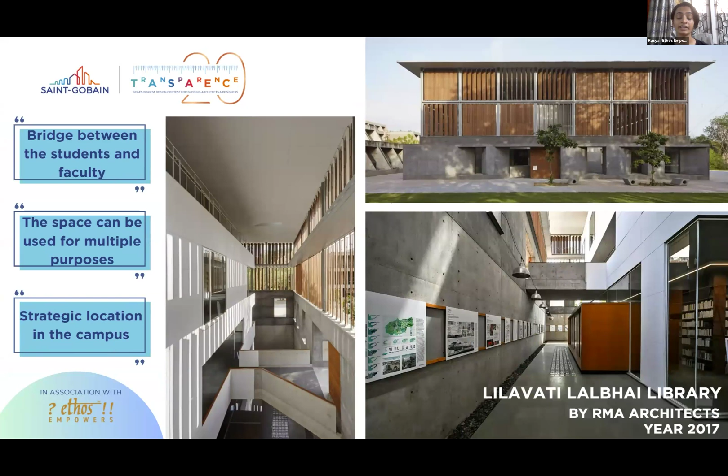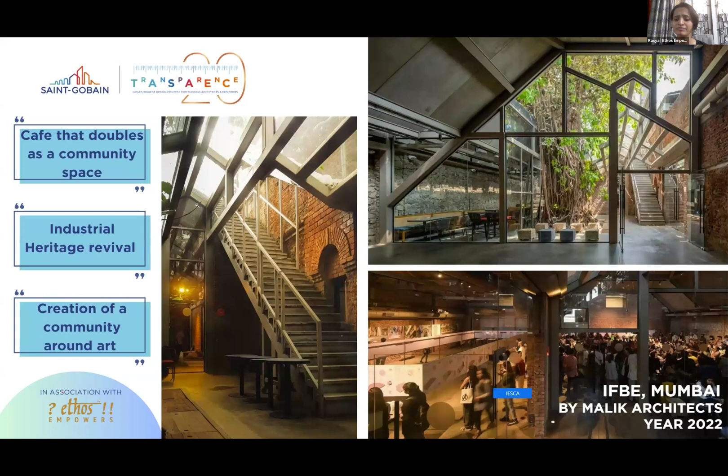Now, when we mention crafting a design vocabulary, we do not want to limit your definition of design vocabulary. It may be the beauty of the combination of form and function of opera houses like the one in Sydney or Oslo, or it could be as down to earth as the incremental housing for the Aranya complex in India, or the austere architecture and interiors of the Lilavati Lalbhai Library by RMA Architects. Or it can be about renovation, adaptive reuse - for example, by Malik Architects, the project we see adapting industrial heritage. It can also be repurposing an old building for something which finds more purpose in present day, or an art cafe that doubles up as a community space. This is just to give you an idea about how vast the topic for this year's Transparence brief is.

Every era leaves behind icons. What will you design for 2047 is what we ask of you.

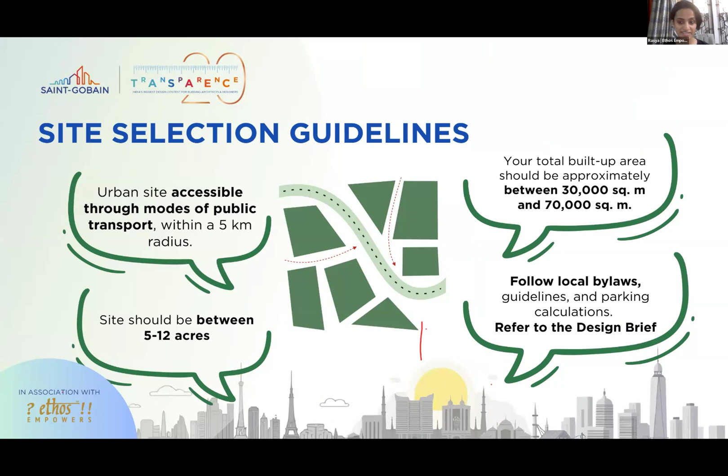I will briefly tell you the difference between the architecture and interior design category. For architecture, while crafting a design vocabulary, you just need to ensure that you're working within an urban site and dealing with a built-up area of 30,000 to 70,000 square meters. Whereas if you choose to participate in the interior design category, you will be working within an intimate scale of 900 to 2000 square meters and will be renovating and designing the interiors of an existing structure. So based on whatever it is that you are working on in your studio projects, you will be able to select which category you could best try within.

Last but not the least, the most important are the timelines. The registrations stay open till end of the month, but we invite you to register as early as you can so that you are in loop with all the latest information and learning content that we keep disseminating on our mails and social media for the competition that could be helpful to you. And the submission deadline will be 4th of November.

We understand that soon after this, a couple of weeks after, would be your academic submissions. So do not worry, because all we ask of you for this competition is only 12 A3 sheets in digital format PDFs that need to be uploaded without any of your identifications, be it your name or college name. So you could work on your strong concepts, send it to us, and continue working on your academic projects and avail the opportunity for your academic work to be awarded and recognized on a national, even global, platform. And even if you do not make it to the regional or national finale, every entry that is deemed complete and adhering to all the rules in all respects will be getting a participation certificate as well.

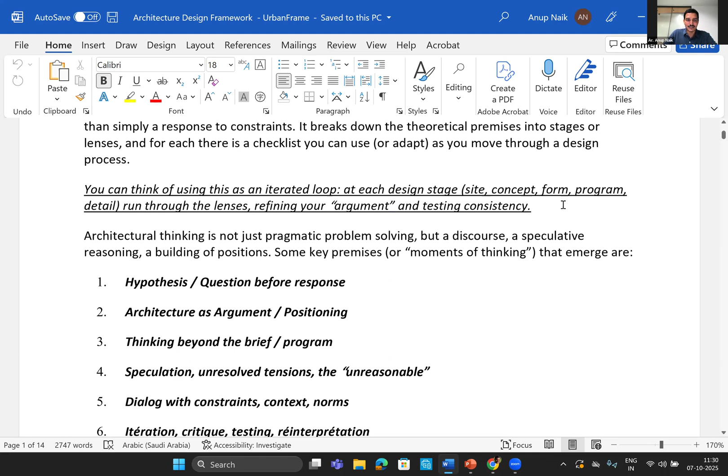Now, with that said, let me navigate you through this. This is a framework which we've created for ourselves. I'm placing it in front of you all—you can take it, modify it, interpret it in the way you think is ideal and workable for you. We do this at every design stage, right from what happens at the concept level, to the program level, then it goes to schematic design, design development, and up to construction administration. So all of this becomes part of our daily process.

So what I would want you to look at is, if you break the projects at every stage into 6 fundamental framework parts. One is your own hypothesis, that is the question before response.

Normally you would get a project and someone will say design a school, and then of course someone will come and tell you I need 20 classrooms, 30 classrooms, and things go on around that. But I think it's important to question the brief itself. So in most cases, our first position would be to question the brief.

And to actually work a hypothesis around that. Then to look at architecture as an argument. And this comes from where you want to position the project. Position, I mean, from whether you're looking at it from an idea of resilience, future proofing, or what you want to give back to society. Somebody's talking about biophilia, somebody's talking about sustainability.

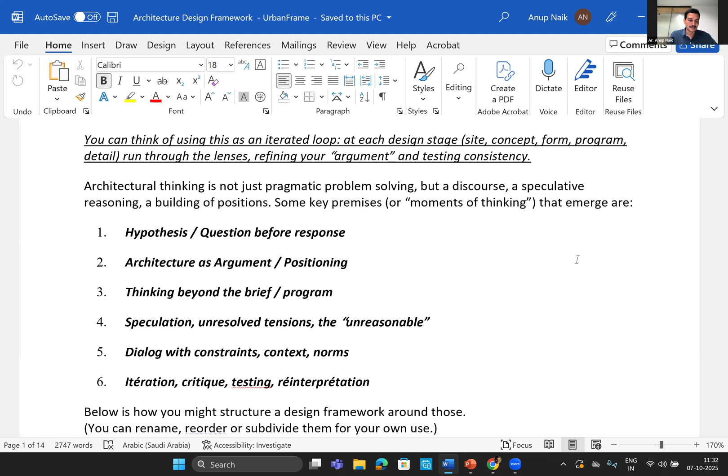So that project needs a clear-cut positioning. Then the third bit actually comes from the point that you question the brief, and as much as what the hypothesis did, you go back and start questioning the brief itself. And what more would you add? I think as architects and designers, our constant endeavor is to tweak something so that it becomes better. You add more value, not necessarily in doing the architecture bit of it, but also in redefining the program and the brief.

And then you touch upon, I would say, this part which we believe is the unreasonable, and this is mostly to be speculative. Here, you are in this matrix of actually looking at all the tensions which the project can go through. Now, what would this mean as tensions?

Let's say there is a programmatic tension, whereas they're asking you to fill a lot of space or a lot of functional areas into a small bit of site, and then you look at that - that's one position of the tension. There could be that there are multiple different uses which are coming into clash, and that's another tension. So how do you kind of tie these or tether all of this together?

Then the fifth part actually becomes part of the dialogue with the constraint, with the context, and with the norms. And then the sixth part is actually you go into this idea of you keep iterating, you critique, you test, and reinterpret, because design is not one single line on paper, right? You continuously keep iterating, you critique, you test, and then you reinterpret.

Now, let me place this in a little more detail so that it becomes easier for you to navigate. So, at the hypothesis level, what we do is we raise certain critical questions. The questions could be as simple as, I've articulated a central question or a tension I want the project to address, because every project eventually is addressing beyond the functional domain.

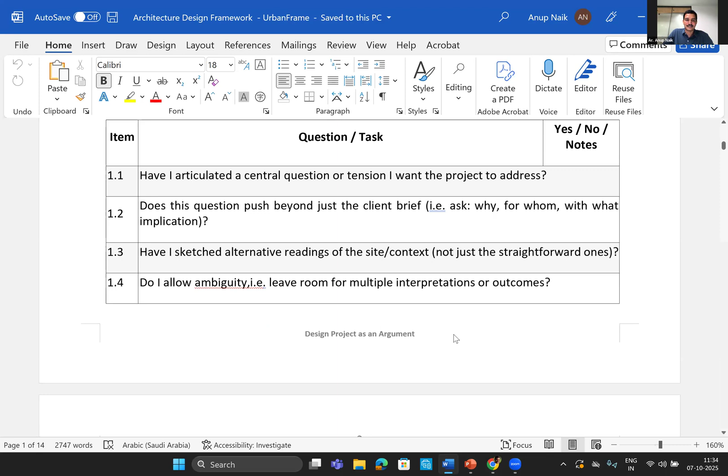Does this question push beyond just the client brief? When we ask for whom, why, what are the implications? Have we actually sketched enough alternative readings of the site and not necessarily keep it as straightforward as possible? Do you actually allow ambiguity to be part of your design process? Because ambiguity actually provokes you enough to look at multiple interpretations and outcomes.

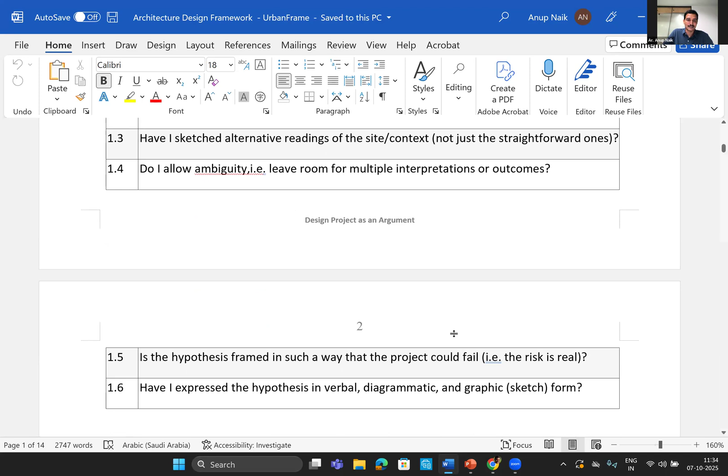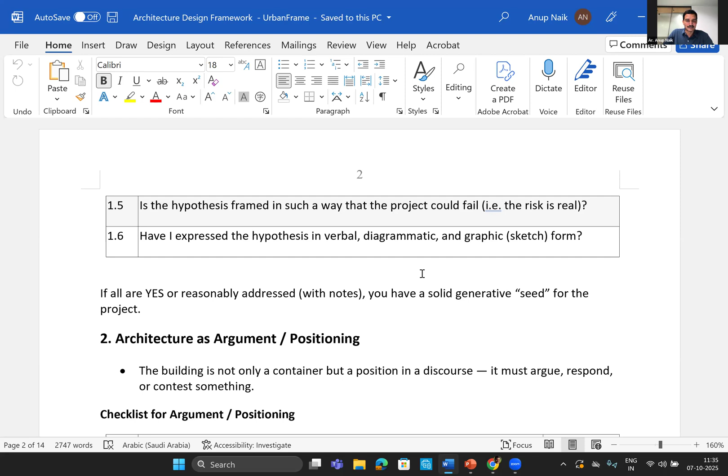Now, once for all of these, if you've got an indicator that it is all yes, along with your notes, then this means that there is a solid generative idea for the project. And I feel that this is the most contemplative zone when you start getting into the project level.

Now, let me go to the second cycle, where architecture becomes an argument, or it becomes part of the positioning. Here, what would happen is that we ask ourselves, can I state in one sentence what the project is arguing about? It is going to claim something. What is that claim? Have I defined that claim enough?

And has each of these major decisions, whether it is massing, circulation, materiality, like many of you spoke earlier, support or contradict the claim? That means you're tying up your argument along with certain decision-making criteria. Then you also place counter arguments.

This, I believe, is a very important part of why we need to do a lot of role play, because in the architecture world, and sometimes we do architecture in public domain, we don't know who the end user is going to be. And most often we wear different hats, right? We start role playing. You play the role of a child, you play the role of a senior citizen, you play the role of a person who's coming and cleaning up the facility, or you can come back and say, I'm a politician in this project.

So you play multiple roles, and that's the series of arguments and counter arguments that would happen. This also would mean that you look at counter arguments, whether the program versus openness, whether tradition versus modernity. So you create the duality of an argument across these things.

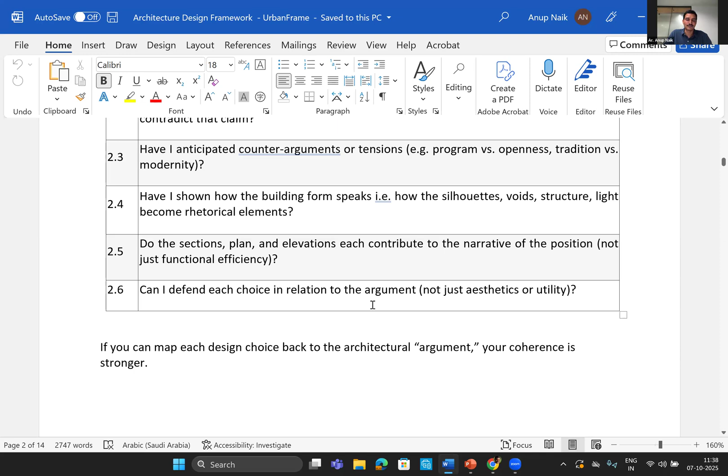Now, with that comes how to actually ratify that when you start doing sections, elevations. And then the last bit of it is about whether you can actually defend the choice which you made. That means you created a very clear-cut argument in defense of the position you've taken in the design process. I think that is a very key part of it, because it starts becoming more coherent and significant.

Now, this is another very interesting part, because sometimes what happens is that when we receive competition briefs, you more or less find that it could be copy pasted, it could be coming from somewhere, they've seen a precedent and they want you to do the same thing, and then you argue that out. So usually, I think the big success story, at least for us, is that when we question the brief every single time and add value to that brief.

So here you would largely look at whether you've examined the brief or the program completely. Are there overlaps? Are you looking at what can be exploited, which is not completely prescribed in the sequence of the way the brief is written?

Can you look at actually hybridization? Can you look at alternates to this brief? Can you look at future-proofing this? Can you actually look at whether you've challenged cultural norms, societal norms, environmental norms? Have you challenged actually the programmatic assumptions? It also would lead you to look at

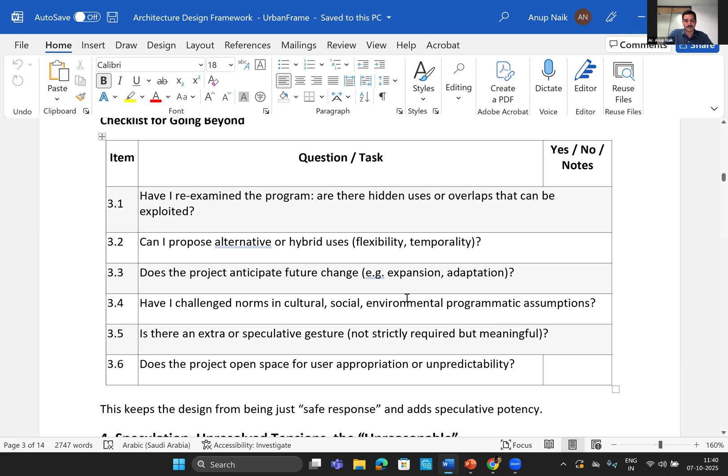And finally, it is for whom are we doing this? It's finally for people, right? Eventually, you go back and ask yourself that, does the project open space for user appropriation or the unpredictability of that? Because every time there is this dimension of unpredictability in all our projects. And this means that what would have been a very safe response, we actually challenge that safe response and look at something which comes from absolutely the speculative potency, not missing the dynamics of what the safe would give you to deal with.

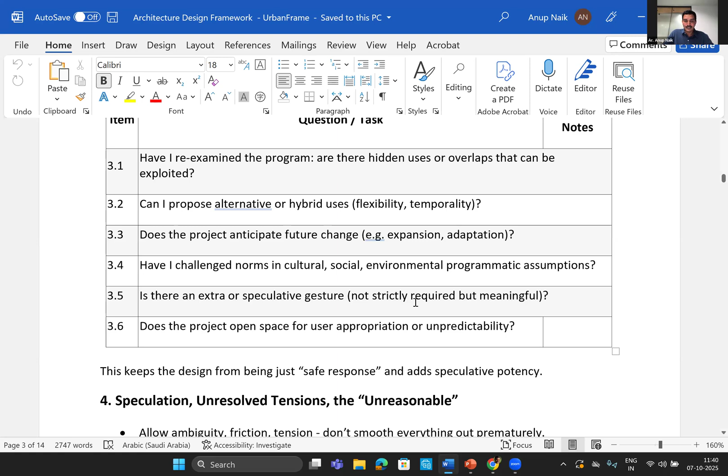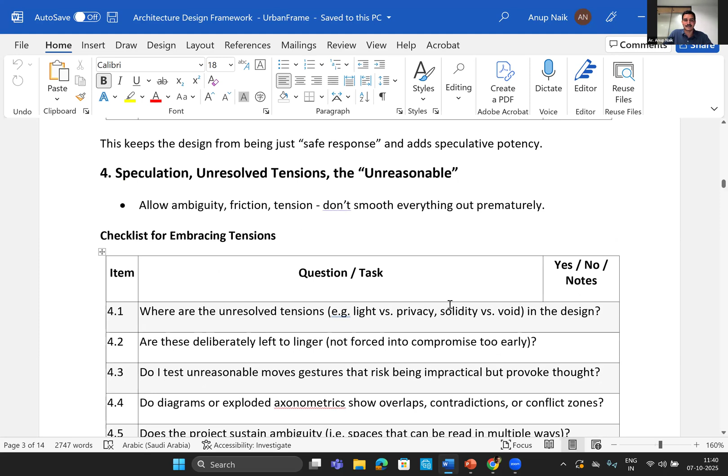Now, with that, it actually leads you to the fourth iteration, which is normally what we call the SUTU, that is your speculation, unresolved tensions, and the unreasonable. Now, once you allow ambiguity, friction, tension, it's going to become—I think you should thrive on that and not try to smoothen the edges prematurely, because you wouldn't have gone into the depth of resolving or embracing those tensions.

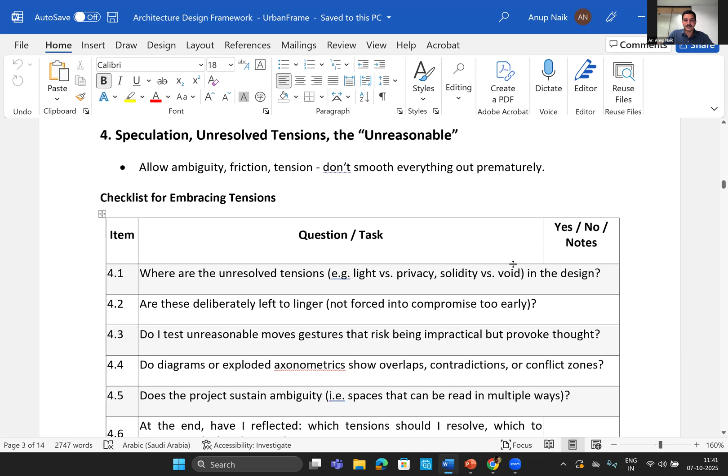And what this would mean is, and that could be anything. It could be the idea of light versus privacy, whether you're looking at solidity and void, whether you're looking at something which is above ground, subterranean. So all these become unresolved tensions.

And have you actually looked at dragging this? Like, it's a very important sport thing, right? If a lot of you follow cricket, you will know the big thinking process of what Dhoni would have said. Can I take this deliberately as late into it? Can I win this in the last over, right? So this is the last over bit of it, right? You actually drag this deliberately to the end so that you don't compromise too early in the project cycle.

Then the other big point is to actually look at the gestures which you have. That is, are you looking at some things which are being impractical? Is this provoking thought? Have you explored this with diagrams, axonometrics?

Have you looked at creating contradictions in that? Are you seeing overlaps? And then you hold back and ask yourself, does this project by itself sustain ambiguity? Because there could be multiple contradictions which allow you to come by, and whether it can sustain all these ambiguities—that's when the maturity of the design becomes far more impactful.

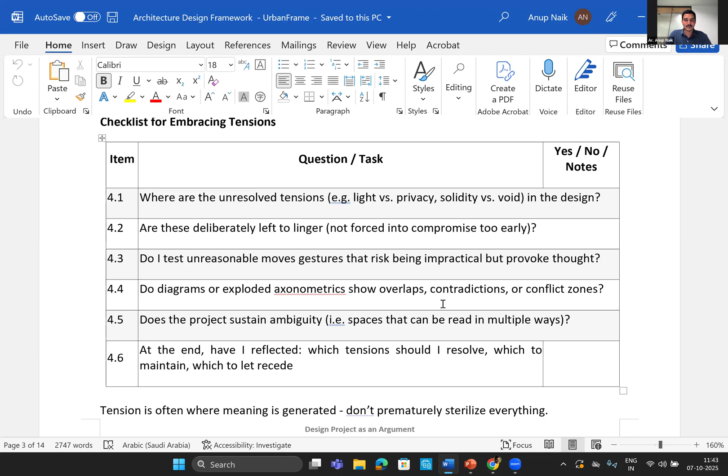And then you come back, I think, in a more reposed condition and reflect and come back and ask which tension should I resolve, which do I maintain, and which do I let pass? Because that's when design maturity becomes very, very important. So tension is often where the meaning is generated.

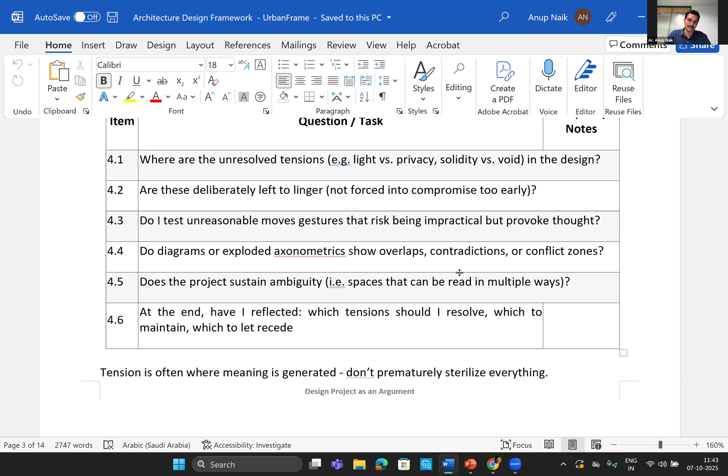This is our belief: once you have placed these two ends and constantly crank both ends of the project, that's when new meaning is generated. My advice is don't compromise too early—don't prematurely sterilize everything, because then you don't move the design forward.

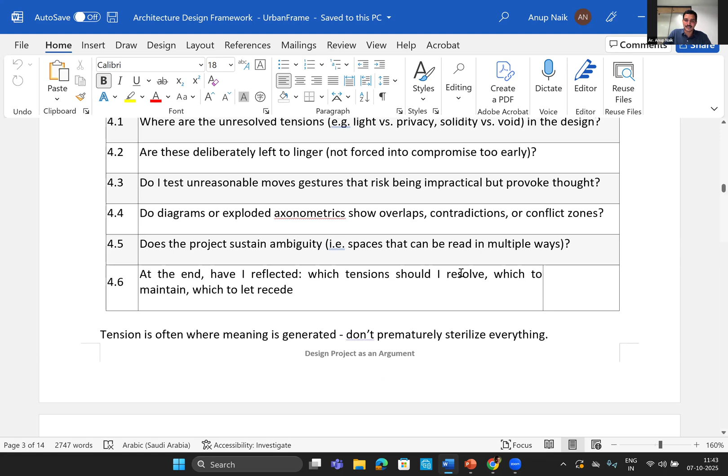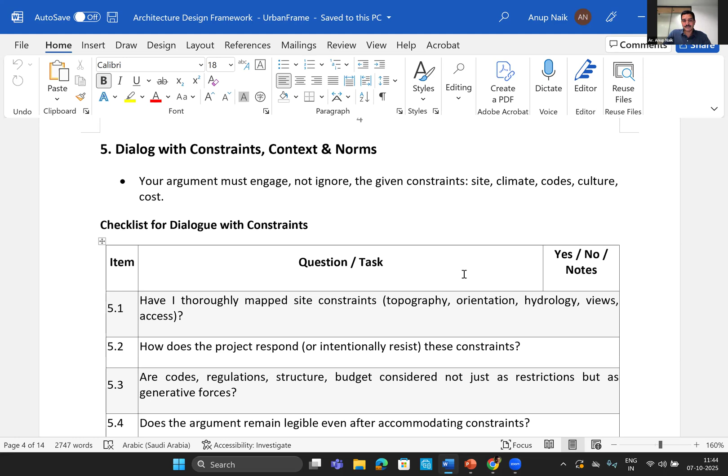Once you've set that, you have to start having dialogues with the constraints, context, and norms, because that's where our argument lies. Finally, these are not just whimsical paper tigers—we eventually need to build this. Then the given constraints come in: there is the site, the climate, the culture, the cost. All of this starts becoming part of the dialogues you want to carry forward.

So you understand where we are today. Even before we created a huge argument, you're testing this argument against all that you need to engage with. It goes back to: have I answered all of these? Have I mapped the site constraints enough? Whether I've dealt with topography, orientation, passive architecture, views if there are views, and the hydrological constraints of it.

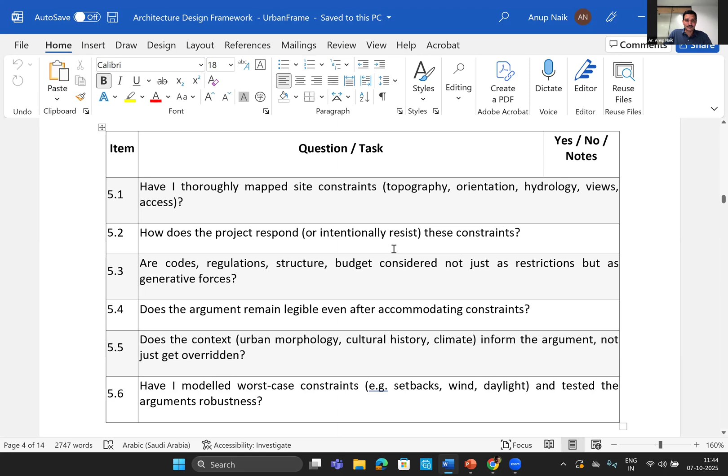Then you also go back and see how the project responds from your initial thought processes, and how it starts behaving when these constraints are applied, and what happens with codal sides. Then you pause and ask whether this argument remains legible at all, and how it's accommodating these constraints. It also comes back to whether the context—the urban morphology, the cultural history, the climatic condition—informs the argument and doesn't get overridden because there is a huge thought process or argument coming up front.

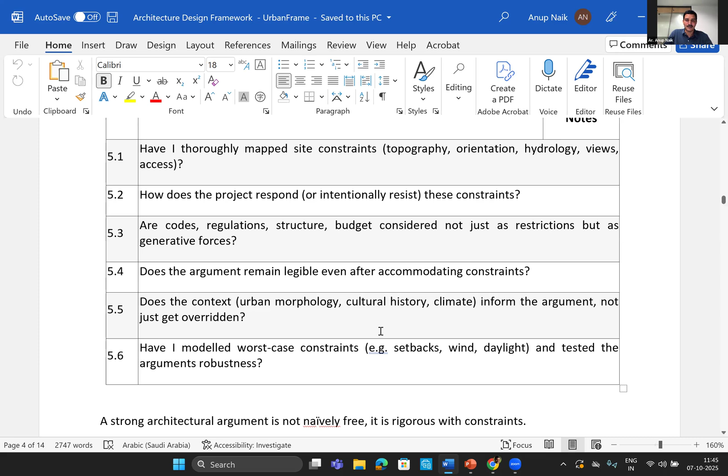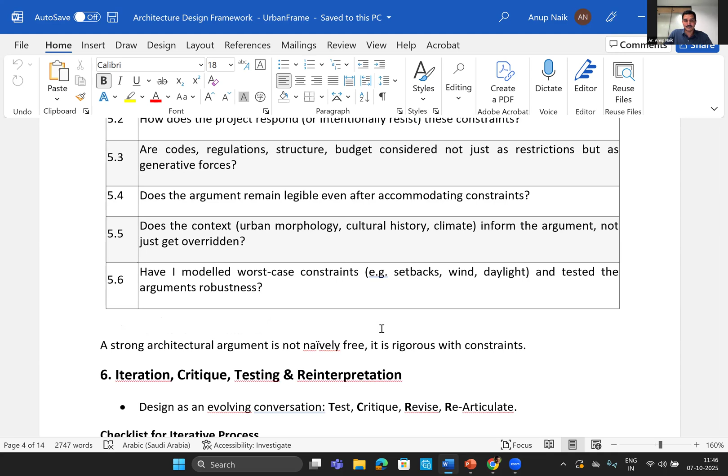It also means that since the project is going to become real, you start looking at worst case constraints and test your arguments for its robustness. That is, whether I've looked at the idea of setback, wind patterns, daylight integration, and so on—all of that becomes part of the robustness you want to look at. A strong architectural argument is not naively free; it is rigorous with constraints. That's when it starts becoming far more powerful as a story.

Now, the sixth and last bit of it, before I jump into the project, is to look at how you iterate, critique, test, and reinterpret. You should believe that design is an evolving conversation. It's not that once you've drawn the first two lines you become obsessed with the line.

We see this often in academics also. Some students doing their thesis come with one master stroke idea at the beginning of the semester, and they don't move beyond that because they're not testing it, not critiquing it, not revising it, not willing to re-articulate because they get boxed into one thought process. The idea is that if you don't iterate, you don't mature.

So you should actually start looking at these iterative loops that we call sketch, refine, test, and critique, and keep doing it until you say, okay, now this is the deadline, and I have to stop here and move forward. So that iterative loop becomes very, very important for the design process.

Now you also go back and look at: have I tested variations? Have I tested the assumptions? I think all this becomes part of that. And then you should always be on a continuous feedback loop, because if you're not open to feedback, you start becoming myopic in your argument, since you would have thought of it from only one way. When a lot of people critique it, the value proposition on the scheme of things starts becoming even better.

What I will do is I will run you through a project which we've been involved with, and might be all the narratives which I spoke about is not completely there, but at least say 70-80% of them is visible. So the reason for the first half was to show you process. The second part of it is to show you how the application of that is done.

Now, let me give you a little background. This is a school which we are designing in, I would say, in the heart of Bangalore. This is a place called Basavanagudi. If people are familiar with Bangalore, you will know Basavanagudi, one of the older settlements in the city, and completely filled with parks and greens, and has a lot of historical rooting, if I may say so.

Now, when the patrons of the school came to us and said that we want to design a school, it's not a large parcel of land. It was reasonably a small parcel of land, and then they said that we want a full-fledged school. So that was as simple as the brief which came to us, saying that we want to run a program which is from nursery to class 10, and this is a small piece of land we have, and we want the school to run in the next 2 years. It was as simple as that.

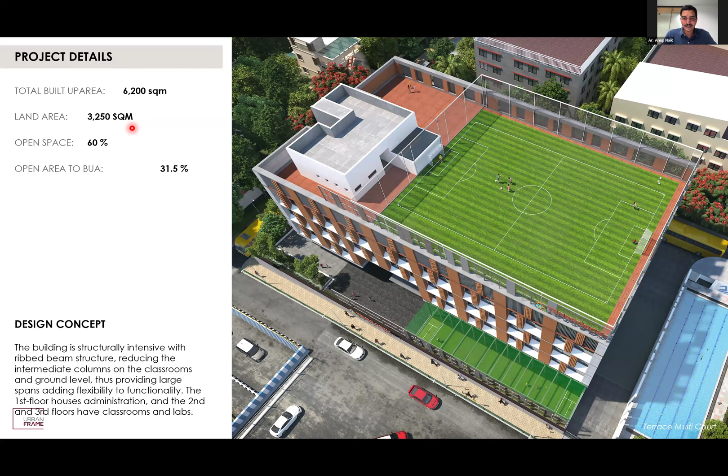So this is just to give you that this was a constraint under which we were operating. And then the site told us a lot of things. Now, for people who are not familiar with Bangalore, I will just give you a little background. As I mentioned, this is Basavanagudi.

And then on the northern half and on the eastern half, we have a lot of the residential pockets there. So completely urban. You must understand that it's completely urban.

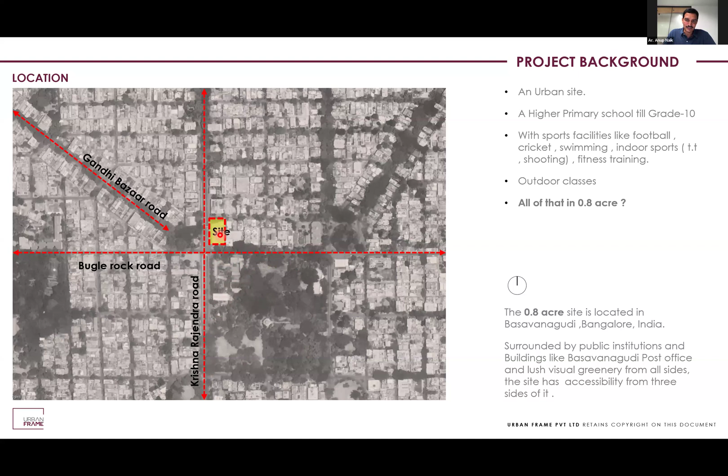So just to give you a quick ideation process - this is the Gandhi Bazaar Road, this is our site, this entire thing was our site. And then we have one of the primary roads within that called the BP Wadia Road, which cuts across.

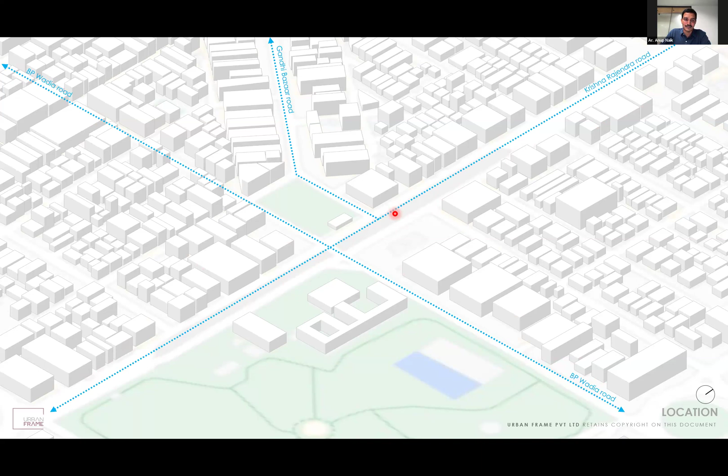And then this becomes a very important city corridor. It is called the KR Road, and that becomes a major arterial road which connects the north and south of the city. And this is basically the three-fourths of an acre of site which we have here.

Interesting, there used to be an old school running here called the East-West School on this site, and a whole lot of trees - there were a lot of large trees within this area. So the first few iterations were actually to save the old school, but because of the constraints of what they wanted to eventually do here to run a bigger program, we had to let go of the old school because that was occupying a very small footprint based on what they wanted to achieve.

But we had another huge task, which was to start looking at the trees which were there. So there were 6 large trees. At least 3 of them were on the perimeter, so we saved them without touching. The balance 3, we took the method of root balling, and we shifted 2 of them back into the site, and the third one into a public space.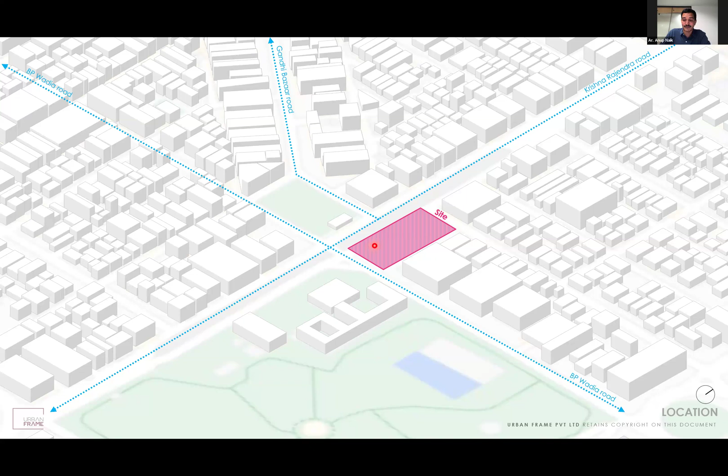So in many ways, we looked at real life in the project. Even before the project started, we said we can relook at reducing the carbon sink of that land parcel. So these were the first very big decisions which we took even before the project started.

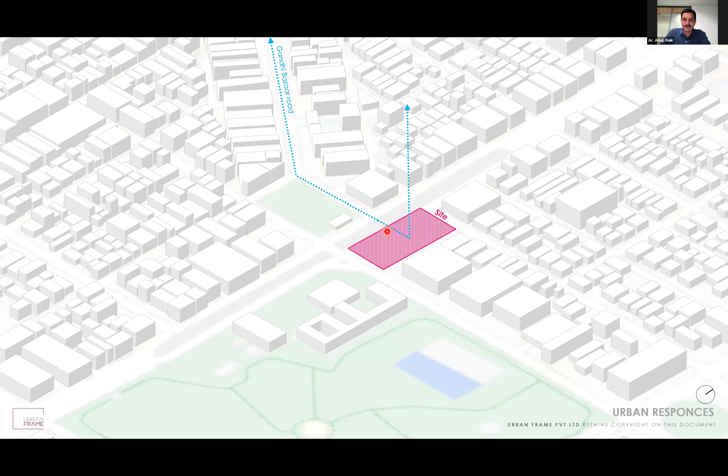Now design indicators was quite interesting, because we said, how do we terminate Gandhi Bazaar Road? Because that was sitting smack bang plumb - if you take that line, it would come back and meet our site in that way. Even if it is notional, if physically possible, you might have to balance what is notional and physical for us. So we said that we need to respond to that mega Gandhi Bazaar Road and how it meets our site, and then you'll see how that keeps changing.

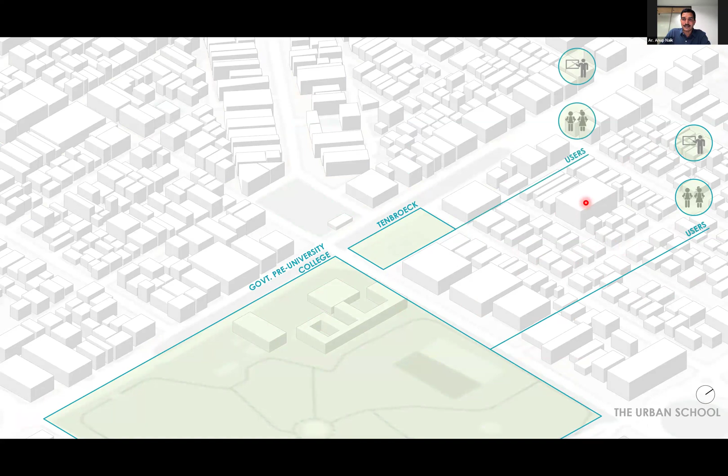Now, that's the pre-university college which I was talking about to you - that is the Tenbroeck Academy, our neighbors. We had to get them also into the picture. It's largely residential beyond the first line, which was commercial, mostly residential in nature, and across also they were all largely residential pockets going around.

Now, with that said, the idea was of not looking at the school as a school itself, but what more than a school. So we looked at the school becoming a cultural performance space. We looked at this having a full-fledged sports facility, so that now it'll come back and ask, okay, how in a small site you would achieve this.

But what would happen is that if you look at the way schools work, schools generally tend to work from around 8 to 3:30, and beyond that, the earlier part of the morning and the later part of the afternoon, they become redundant infrastructure.

So we went about retweaking the program and said, let there be a school, let it function in the way you think you want to run your academic program. But otherwise, we look at this to become a cultural space. We also look at this to become a sports-based facility. We also allow the neighborhood to come in and trickle into the school and continue to use the facilities during the non-school hours. So that was the complexity we wanted to bring in. And that's also the reason, if you go back to our iterative process, we questioned the brief. We looked at what more we could add into the program and what more we could contribute to the community.

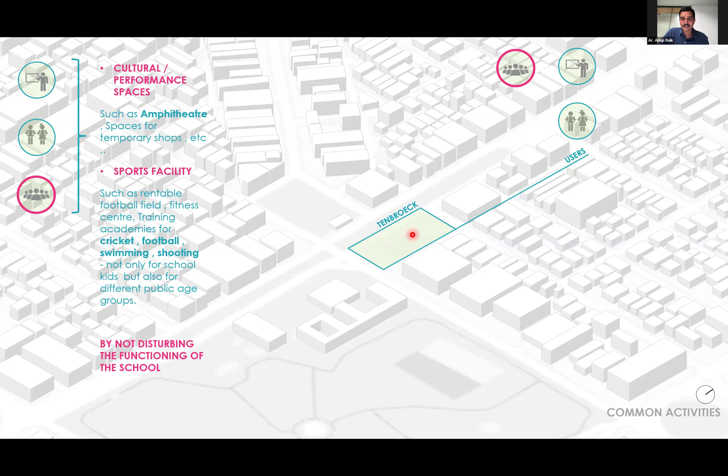So for us, the big shift was to look at a large amphitheater within the school, which would, in more than one ways—if I showed you the earlier graphic—the Gandhi Bazaar Road would come and terminate into this amphitheater, and that's the notional connection we had. And then we had the sports facility. So what we did here was to look at having these two extreme cores, which kind of anchor the project together.

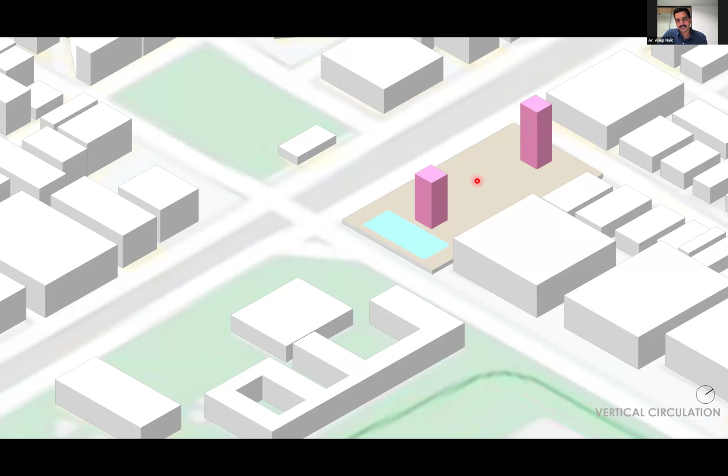And we lifted the school off from the ground completely. So there is a basement largely for utilities and function. Beyond that, we lifted the school off the ground, so there is a ground plane continuity. From here, there's a ground plane continuity. From the park adjoining, there is a ground plane continuity. And the entire ground plate started housing multiple sets of activities.

And similarly, we exploited the terrace also, because the terrace became very critical for us from an activity point of view. Now look at this core—this became the public core. So people from the neighborhood could come in, take this core up, and end up utilizing this 7-a-side football facility, two half basketball courts on the roof. And if they're on the ground plane, they could end up utilizing every other sport-based element on the ground floor. So that way, the first success story was to make this absolutely porous and contribute to the community at large.

And it's interesting that now you might come back and ask me, did the patrons of the school agree? First they were reluctant, but then we kept pushing the idea, and then they saw value in what we said. And today it is probably one of those very interesting and very high-performing schools in the way it has multiplicity of function. It behaves as a school, it behaves as a sports arena, it behaves as a cultural space. So that was the big shift when we connected the dots on this project.

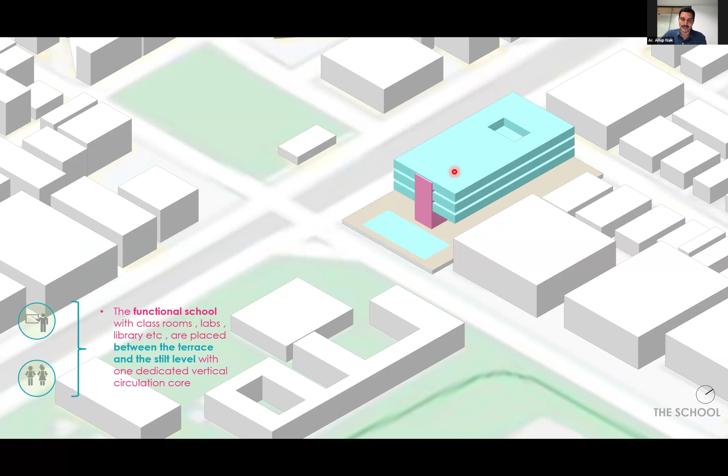Then there are functional aspects of it, that's across 3 floors—it gets lifted up. There are regular classrooms, there are labs, there are performance spaces, there are areas in which the community can come and end up utilizing. So it actually had all these functions plugged into it, and that's when it starts in a total sense.

We've also been able to put a little swimming pool, around 25-meter size, so that could also become part of an academy which now runs the sports fest. The pool is run by a swimming academy, and then the football is run by another academy, and then the cricket facility, which has two pitches, is also run by multiple academies.

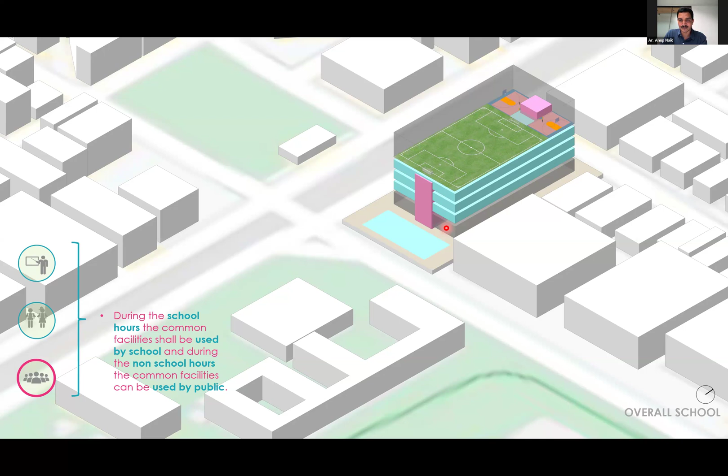So what also happened is there was a business tweaking. Now the school also said that what was a dead asset before—from early morning to 8 o'clock and from 3:30 onwards—also started looking at new revenue cycles. So most often patrons also understand finance, because that's what they need to know: that this is also going to raise extra revenue for you. And that meant a lot of those common area requirements were also offset, because there was this possibility of re-looking at multiple academies becoming part of running these sports facilities.

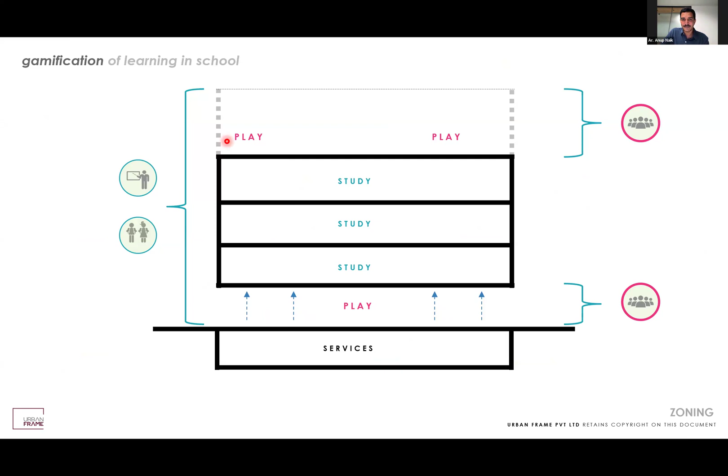Now, just so you understand, it started from a very simple idea: disrupting. Then we took the idea of gamification. Then we said, how do we start gaming this? Gamification doesn't mean only looking at sports, but it meant that there are multiple activities—how you go from one zone to the other, there is always a journey for you. So what was two levels of play got interfaced with the study in between.

We looked at multiple options of how to start engaging with this, from various conceptual cross sections which we worked on. The idea of the ground plane completely becoming social, and then it breaks up into a public study zone, and then 3 floors of academics, and then the play area becomes part of it. So in a very simplified graphic sense, this was what we achieved.

So anytime you move through this, there is the idea of journey, there is the idea of destination, and that's when we started, the idea of gamification started becoming very, very important. Of course, now you have to make this functional, right?

Then we started looking at how to get natural light in. So the idea of looking at the central area becoming a courtyard, and allowing daylight to penetrate inside. We also looked at a screening-based system, which I'll run you through, on the western side, which allowed us to get softer light into the school. A lot of it is climate responsively done, mostly driven from a passive design point of view. And today, the school runs without actually switching on a single light, other than on bad cloudy days. It's completely blessed with enough light and cross ventilation.

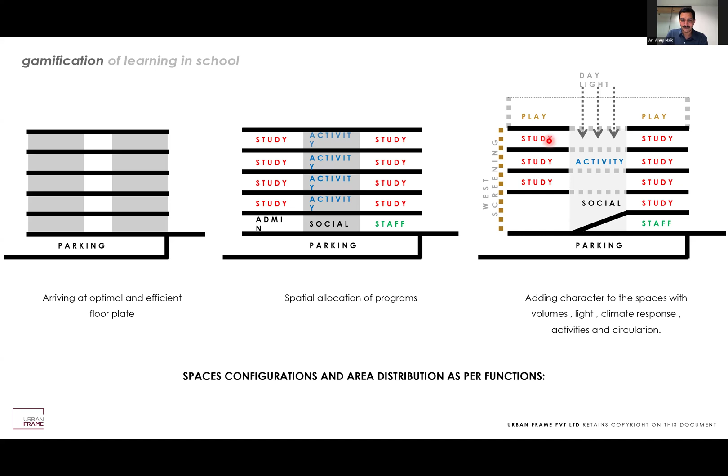With this said, and with what we started looking forward, we started actually putting things into clear cut perspective. So there were many ways in which we started looking at seating arrangements, how to get soft light inside. Sometimes there are issues of glare. What it means for the teacher and the student to interact, whether it is shorter depths or longer depths.

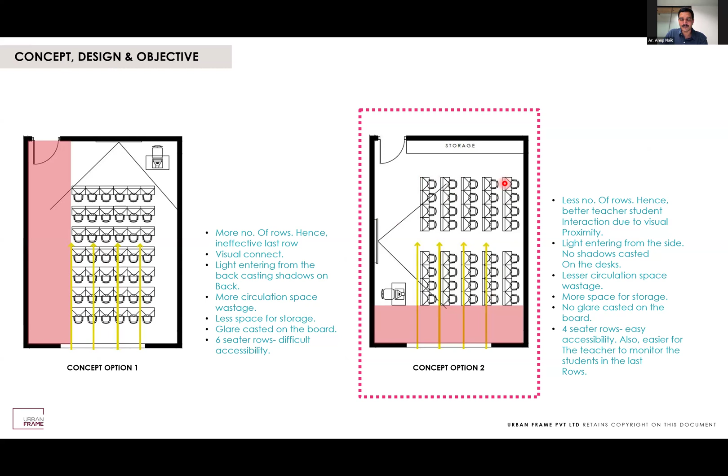Everybody from the stakeholdership was consulted to see the best format for classrooms to be worked out, and they also operated on, as I mentioned, a Montessori-based system. That way, it allowed us that the classroom could be completely rechanged, moved around, so that any new faculty who would come and run a specific program, the class would become completely flexible.

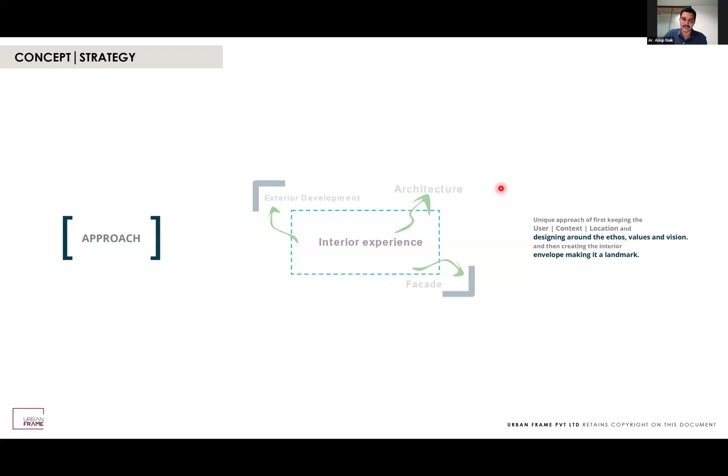Now, with all these value sets inside, it meant that it should have also a very strong interior experience, as much as the architectural experience and the public space experience happens. So we looked at the method of color through the entire project, and you'll see that done. Each of the transit areas, each of the comfort zones, each of what within the school is public, or which is private to a classroom, the color format, the color palettes change. And we believe that the color palettes actually become very engaging when you start looking at child behavior.

A lot of research has been done on this discipline. We took off from wherever research was done, and we used it as part of the process.

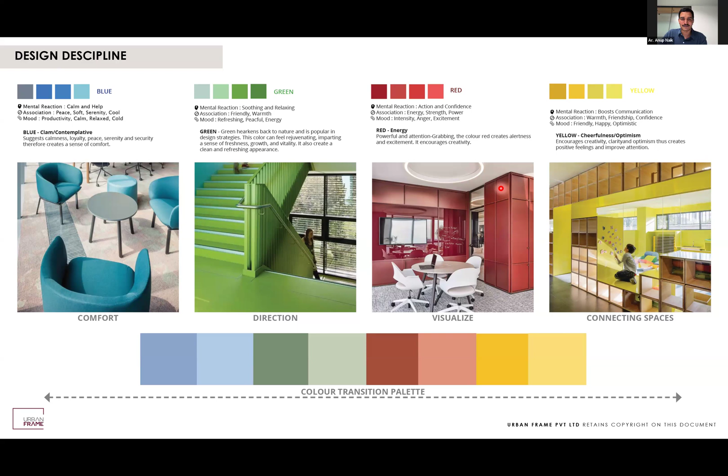Now, what happens here is just from what we were able to fit in as amenities, other than the base level classrooms: a 25-meter swimming pool, a 5 or 7-a-side football ground, 2 half basketball courts, a 10-meter shooting range, 2 cricket practice nets, a table tennis area, and you name it — a 50-meter running track, a veritable jungle gym, multi-purpose hall, herbariums, informal learning spaces, and it went on.

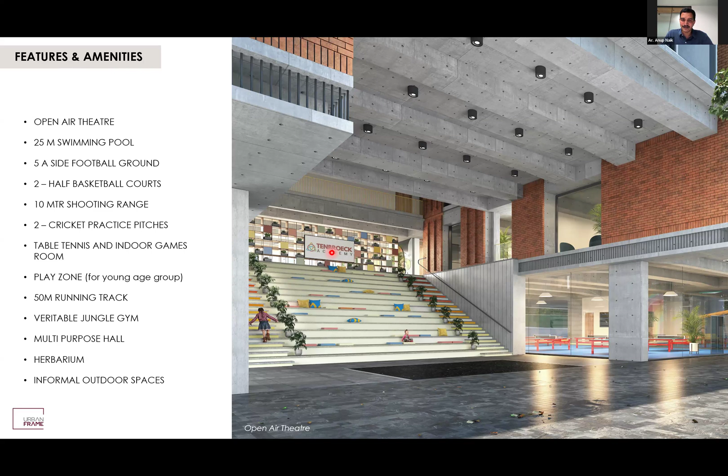And then more and more we asked ourselves: how did we challenge the whole architectural premise, and start looking at space planning from how you can — it's not necessarily large parcels of land, you can actually fit a school into a small site. For us, it was a big contribution, I believe, as a typology shift to the architectural domain, in how to start making compact schools and offering everything for it to succeed.

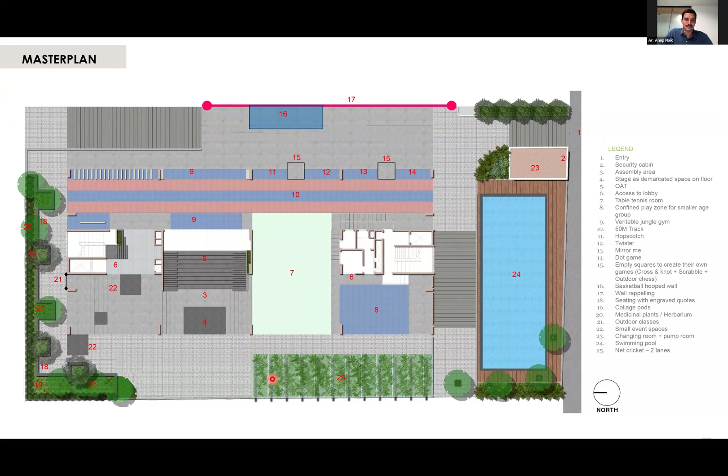Now, a quick understanding of the master planning itself. These were the 2 large roads which we have, so we'd enter from here. We had a drivability where we would get out from here, so this could be a through passage. Most often school buses would come in, drop the kids, move out from here, and then go into their parking lots. That was a 50-meter running track. We had the possibility of doing 2 cricket pitches here, the open air theater, multiple functions as it came by. So the ground floor, effectively, other than the courts and the movement lines, everything was open.

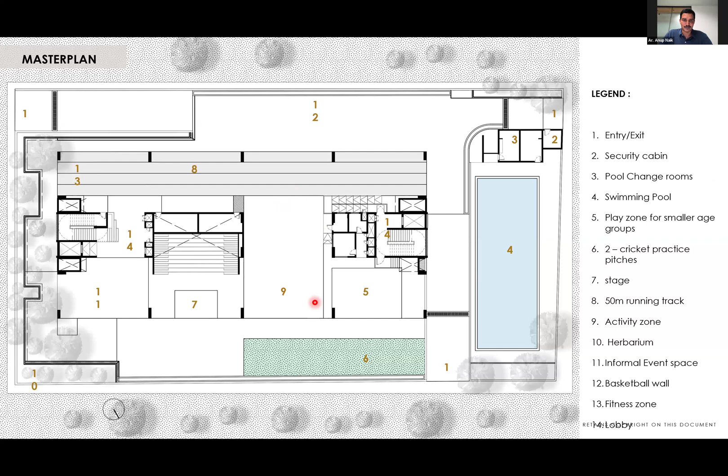So the entire school was lifted off from the ground, and this entire ground became this new playground or public space for the school. Then as we went up to the upper levels, on the first floor, I would say...

The open air theater also becomes like a stairway leading you to an open rehearsal area, which has multifunctional facilities. It takes up multiple behaviors through the period of time. It works out like a large breakout space.

And then we have the classrooms set in. Each of these classrooms is also done in a way that it could be opened up, can be modified, can be changed. So the structural grid became quite important for us. The more you look at it, you don't see columns within the classroom spaces. They all become clean grids.

We also set the columns inwards. If you notice, that's a structural line, so that the entire ground plane could become larger, so that the functional space in the ground floor works. So everything started informing—the program started informing the architecture, then the structural grid started getting informed. It was a simultaneous process of multiple things falling together.

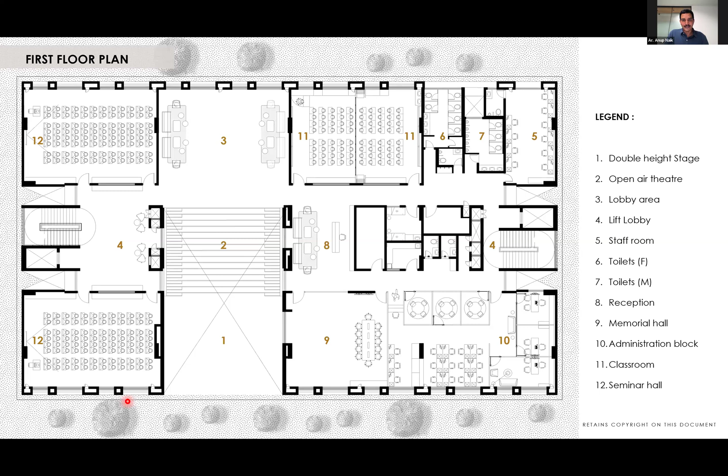And if it was full blown, this is how the entire classroom set would work out in the upper floors, in the typical floors. And then the terrace would become part of the entire play arena, which we were able to evolve.

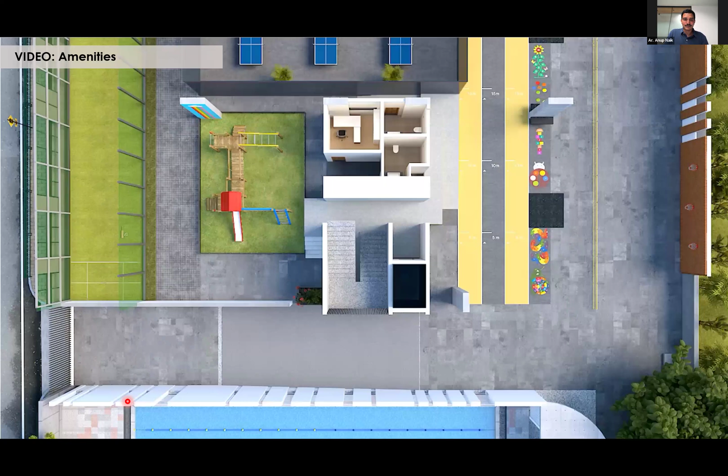So just to give you a little glimpse of what happens—that's where you enter. Then you'll see all these amenities kind of popping by.

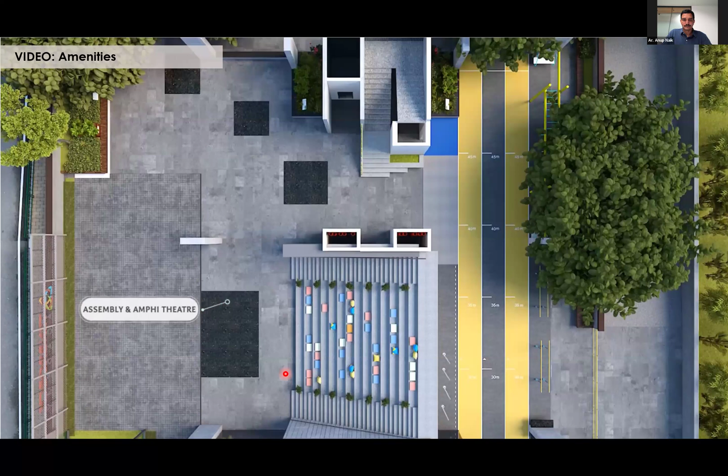So what you see is all the big trees. We've continued to hold them and not disrupt them. So with that said...

Since we drive a lot of sustainability within the organization, a lot of what we do sits in the domain of the passive side of things.

So we used a lot of the Porotherm blocks, which are lightweight, highly insulated, and that also helps to cut down sound. It also becomes extremely durable and works like a heat sink. We used glass, which is ET150, to cut down solar heat and reduce glare within the building. We looked at a lot of material control, I would say.

We looked at steel and concrete. Of course, the steel and concrete was also bought from source, which was less than 100 kilometers from the site. So that's how we reduced our carbon footprint on this project.

We also had a complete group doing quality audits on the project and peer review as we went through the cycle. I think sometimes it's not about now, but it's also about future proofing. We said, use material in a way that I don't need to keep maintaining this building. So we stuck to the idea of brick and non-plastered surfaces, and this became very critical to the way the project looks.

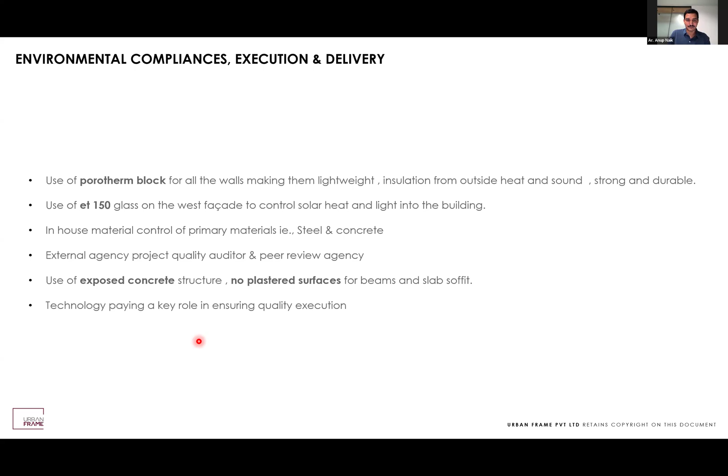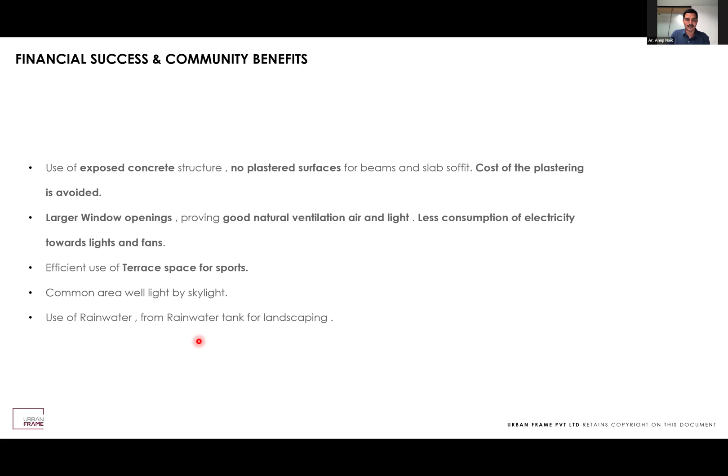It also meant—finally people will understand in a reasonable way how you become financially successful. So today, based on looking at the methods in which we set up the passive side of it, we are completely, more or less—if you take a time cycle—not using energy, let's say electricity, other than running systems. For lighting, we don't use electricity until as much as around 3:34 in the evening. And we looked at the idea of bathing it with light, cross ventilation, and a lot of rainwater harvesting. So we are more or less water neutral on this project too.

Some quick images—this is how the school now looks. Multiplicity of spaces. I feel we've had a very interesting exercise where we took feedback from the children who came to use it, and they are the best judges for your school. It's not about your peer group coming and tapping you on your back saying you've done a great job, but it was very nice to hear kids talk about what they enjoy in the school—the idea of openness. They're free, they're safe, they can pick up anything, they can move around. The idea of fluidity of space—all of this became part of the big storytelling.

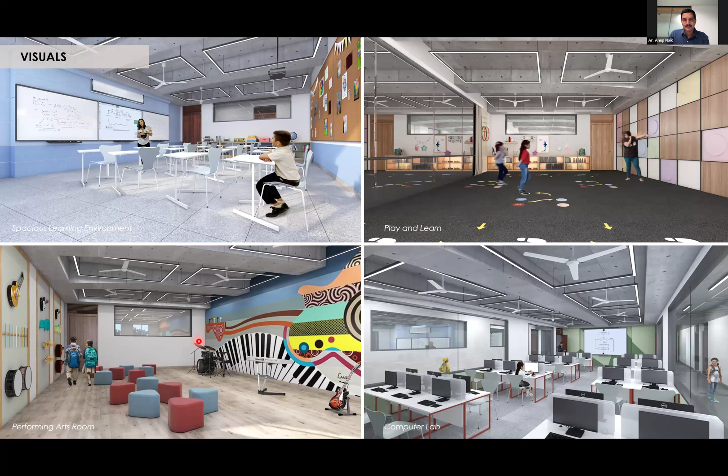So these are some quick images. I'll move from here—that's how the school looks. These are all the internal spaces. So from what was conceptual to what we built, I think we didn't change much at all. And that was the strength of having a very powerful concept, with people buying into that concept and then starting to work along.

This concept—buying in has to happen at every level, from the stakeholders to the last person on the site, even the bus driver who comes and takes the kids in and out. All of them became part of the narrative. So this is how the school looks now.

And we're very happy to say that this has given us a lot of recognition in India and globally. That's how it is set in the urban environment, completely bound by trees. A lot of the trees you can see on the edges are all replanted, and they've all survived. So that's also a big story for us to talk about.

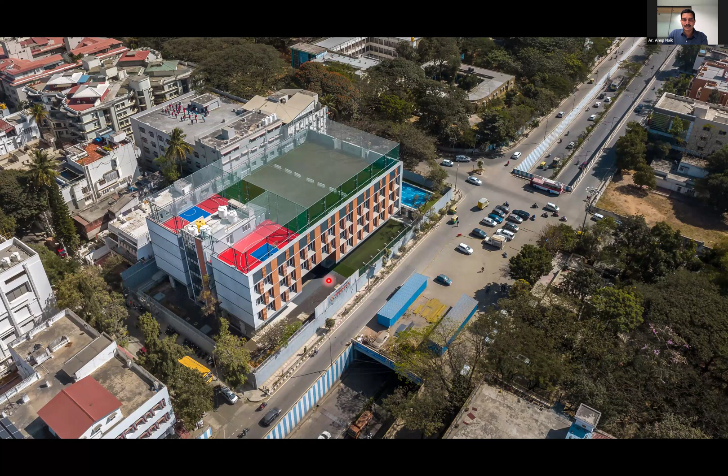So this is how it sits in the urban environment. You can make out how the neighborhood kind of reacts. The main road access comes and enters into that. So all the first principles kind of fell into place.

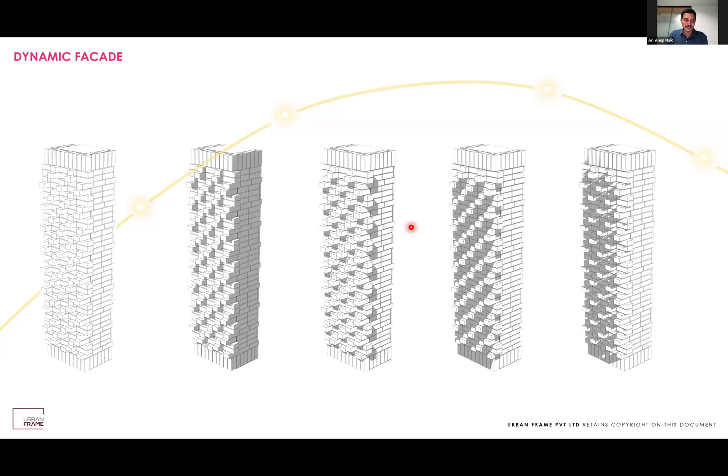Very interesting, we also looked at the idea of the facade, because large parts of it, due to the way the site was oriented, were Western facing. So we wanted to break the facade to cut down the heat gain. We did a lot of tessellations and a lot of inquiry through a simulation process, and we came about with some good shading devices on the surface. So we had great skin.

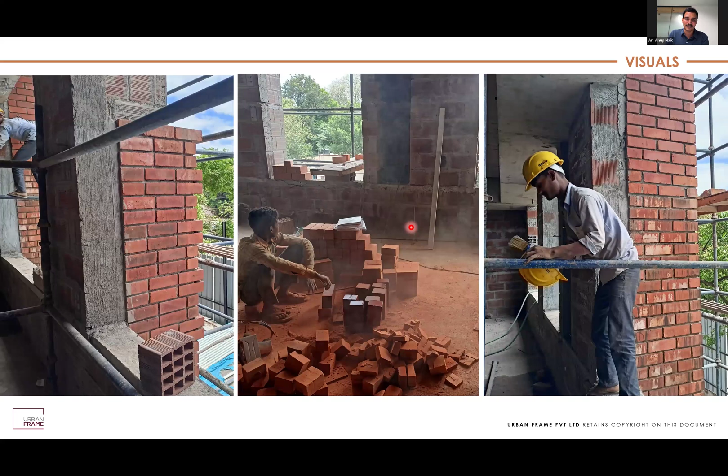So this is another thing which we advocate very heavily: every project we do supports a patron who comes from a specific art form and craft form. Here we got a lot of local craftsmen who were doing good work with brick, and they came back into this. It's just a method of, it's not about you as an architect, right? Eventually it is about the ecosystem in which you're working. This has always been one of our strengths, that we promote at least one craft or art or skill in every project we touch, purely from seeking continuity, not for ourselves, but for the skill.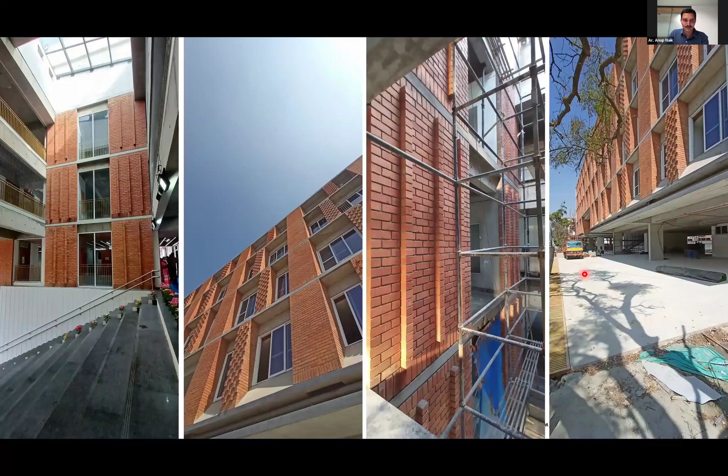So this is how finally the facade took shape. The idea was to break it up as much as we can. There's a lot of those bits of the story which came through. We looked at a lot of thought process in how each of these started integrating into one another.

Even small level of detail matters, because sometimes safety is very, very critical in schools. So we worked with a company to devise these invisible railings. The bottom railing was compulsory, but what you see are actually very fine-grained vertical strings, so there is no question of an accident happening, with kids peering down and looking, because it's all connected. You know how sometimes a friend sitting on the second floor talking to somebody ends up tipping over the railing. So all these were big concerns, and we said how to secure the campus.

So the question for all of us is that there needs to be a very, very strong ideation, commitment to that idea, and navigation through these ideas. You will hit roadblocks, but if you've gone through those six processes I spoke about, your affirmation of what you want to do becomes even stronger. For us, as we navigated through this, the school was not a school anymore. Our first principle of taking the idea of gamification became real, and that gave us the best joy.